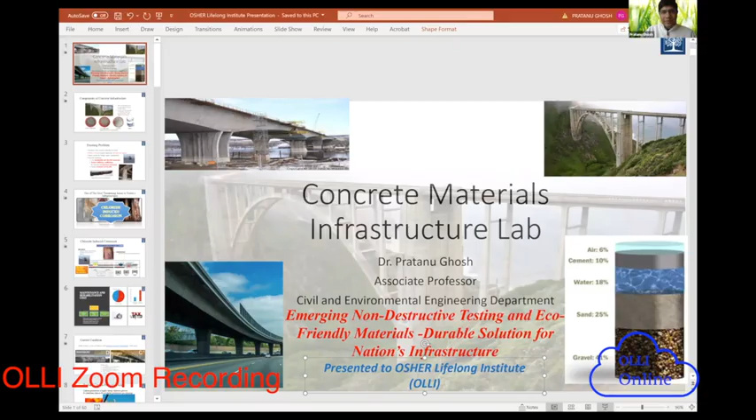So I'm going to talk about basically today two parts. One is what kind of high performance concrete material should we choose for enhancing the service life of bridges and pavements throughout the US, and what kind of emerging new non-destructive testing should we follow for better evaluation of our nation's infrastructure, especially concrete and concrete pavements.

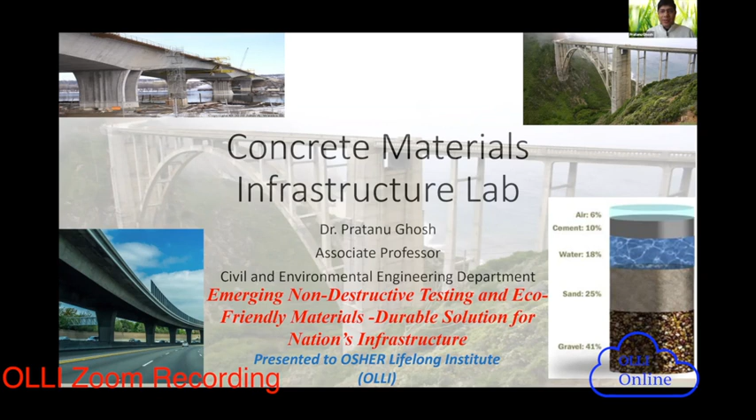So being said that, we need to think about what we are talking about with concrete infrastructure. As we know, 70% of all bridges in the US are made of concrete. That's the federal highway data from 2016. And in 2015, 80.4 million tons of Portland cement was produced in the United States for construction of concrete bridges, pavements, or other infrastructure like tunnels and dams.

So we can imagine concrete is one of the most versatile and most widely used construction materials, not only in the US but all throughout the world. Most everyone is probably aware that concrete is made of aggregate rocks, fine aggregate sand, cement, obviously, and water. And sometimes we need some chemical admixture to enhance the process of the concrete.

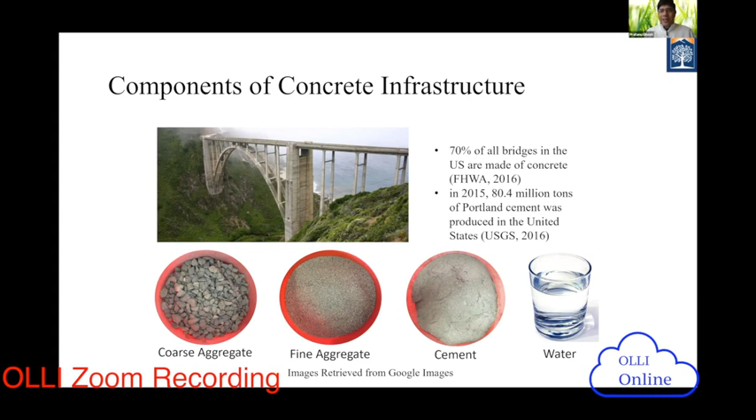So I'm going to talk a little bit more in layman's language. I know some parts of the presentation are highly technical, but I will touch down and try to make sure that it is more general.

So being said that, what is the biggest problem right now in US concrete infrastructure, especially in concrete bridges and pavements? We know, other than Southern California, most parts of the US go through in winter a heavy amount of snowstorm or snowfall.

So these roadway salts we put basically in the bridges and pavements to melt the snow in the winter. But there is a challenge - even though the snow is melting, sometimes we forget that this salt starts to ingress from the top of the concrete slab and going through the concrete over time, and then it starts to attack the reinforcement, the rebars within concrete, which is susceptible to corrosion. So this rebar corrosion is one of the major challenges which is happening by chloride ion ingress.

The chloride salts - generally you put sodium chloride or potassium chloride on top of the bridge deck slab or pavement slab to melt the ice. But that salt has a detrimental effect, as we can imagine.

So every year we spend at least $90 million for bridge repair and replacement, just for bridge repair and some periodic rehabilitation. So we have to think about it - it's becoming a burden on U.S. Federal Highway Administration and federal government.

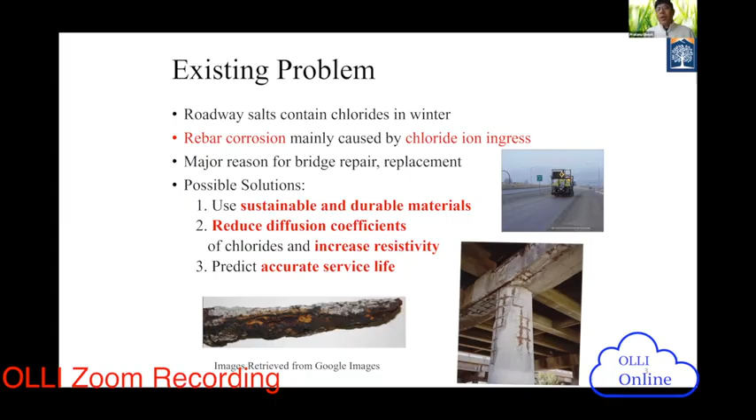If you can reduce or delay the diffusion process of chlorides and increase the resistivity - resistivity being an indirect way of measuring chloride penetration in concrete - then with higher resistivity and lower diffusion, the concrete will be really good, and it can delay the diffusion of chloride. So it will take a long time to initiate corrosion.

It's a natural process, so there's no way we can remove corrosion entirely. All we can do is use really good sustainable, durable materials, use better reinforcement, and predict the service life better, so the rehabilitation process is smoother. The Federal Highway Administration coordinates with different Departments of Transportation on when rehabilitation should happen, instead of doing maintenance every year. So, how bad can the corrosion process get? We can see some pictures.

You see how the rebar looks when it's really badly affected by corrosion. In some columns, all the reinforcement is exposed. After a certain amount of time, it basically becomes functionally obsolete. That doesn't mean the whole structure will right away fall or collapse, but it becomes functionally problematic.

And it continues with the heavy amount of traffic load. Sometimes it's the combined effect of corrosion and traffic load, which happened in Minnesota 10 years ago - on I-35, one of the bridges collapsed basically due to corrosion. Initially the problem was there, cracking developed, rebar was exposed, and on top of that heavy traffic load was going on over the bridge.

As you see in the pictures, this is one of the biggest threats to our nation's infrastructure. What happens when corrosion occurs? One thing to imagine: concrete is very weak in tension. Tension means pulling away - if you try to pull the concrete apart from the side, it starts to crack heavily.

Whereas if you try to push the concrete, it's okay - concrete is very strong in compression. Pushing means compression, pulling away is tension. So concrete is very weak in tension. Due to corrosion, concrete's tensile capacity starts to weaken. That is one of the major challenges.

We always see that concrete covers are there - cover means some amount of cushioning before the reinforcement is placed. If you have very little cover, that's also a challenge, because if corrosion happens easily, the rebar gets exposed, corrosion starts to propagate heavily, and the functional part will be gone. So this is the chloride induced corrosion mechanism.

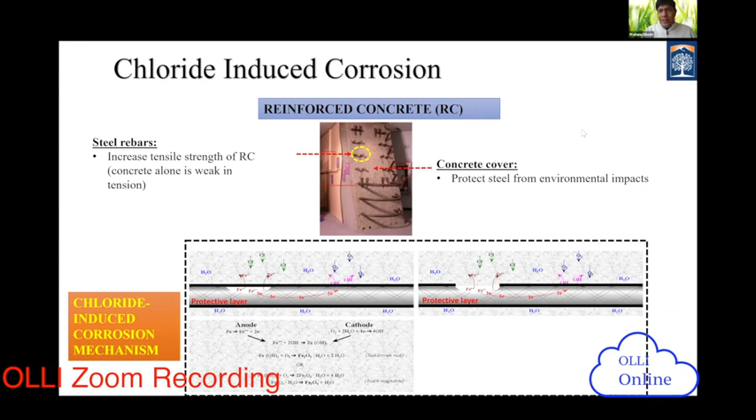Again, I'll start to explain how corrosion happens in concrete. In general, the first thing that comes to mind is that corrosion means the rust product.

So what happens first, at the rebar level, the rust products are formed around the reinforcement. Those rust products aren't right away bad. They're forming a protective layer around the reinforcement. So generally people think rust means really bad, but no, rust is initially okay since it forms a protective layer. As you see in the picture, the black protective layers are formed around the reinforcement.

But then, in the presence of moisture and oxygen, the chloride salt, as you see from the top, starts to ingress into the concrete. We're putting the salts on the pavement, and that salt starts to ingress in the concrete. After a certain amount of time, they start to attack the rebar. The chloride salts come from the top, and then they start to attack the rebar, so the rebar's corrosion product starts to enhance. Then the problem starts, you can imagine.

Initially, the corrosion products, which is basically rust, were okay - we see anodic and cathodic products forming compounds, basically red-brown rust and black magnetite. But after a certain amount of time, they get attacked by this chloride salt. Once the chloride salt attacks, the corrosion process starts to enhance, as you see the buildup of corrosion products. Further corrosion happens, more and more surface cracks develop, and then eventually spalling happens.

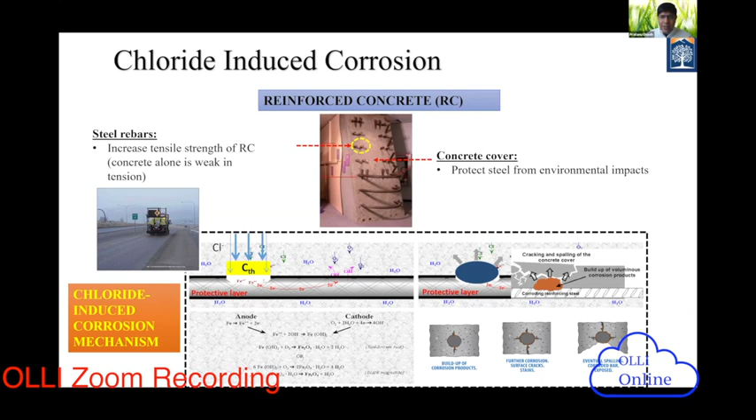So this is the major process. Just to give you an idea how much maintenance and rehabilitation costs are done in the US: the total number of bridges in the US, approximately at the 2014 level, was 607,380, out of which some 200,000 are steel bridges, reinforced concrete bridges are 235,000, and precast concrete, which is also a little bit newer bridges.

Most of the bridges in California, you see precast concrete - they're built in a workshop panel, then right away you can build it on site. It's easier and less prone to corrosion - 108,000 of them. So you can imagine that heavy amount of bridges, all newer bridges are built mostly with concrete because steel bridges are so costly and the corrosion effect is huge. Even though we say corrosion in concrete, it's kind of a misnomer - concrete itself doesn't corrode. It's the reinforcement, the steel within the concrete, that corrodes.

So, being said that, we can imagine who is the most challenging part, which is the rebar, basically.

Current spending on repair and preservation, as you can imagine, is 16.5 billion, and we need around 45.2 billion. So a huge amount of our taxpayer money is going to maintenance and rehabilitation. That's a huge challenge for our concrete infrastructure, and that's why we keep hearing about the infrastructure deal.

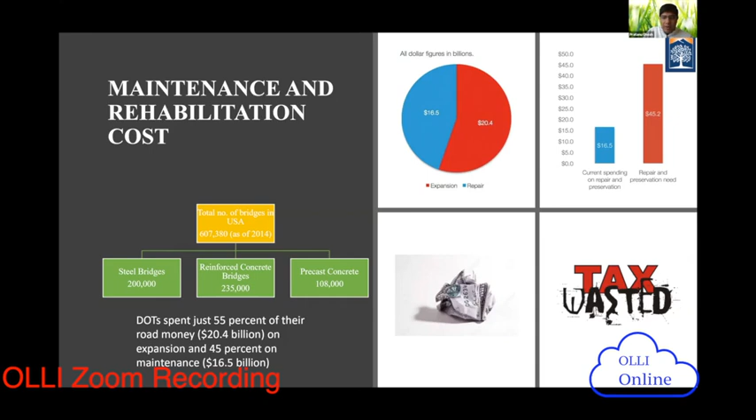So current condition - this is the current condition, though not very current. Just a few days ago the newer rating came out. ASCE, American Society of Civil Engineers, gives a report card, basically a diagnostic report card, a doctor's report kind of thing, evaluating America's infrastructure.

They gave a grade of D to pavement in 2013, and the highest grade was basically a C plus. In 2020, sorry, 2021, just a few days ago, the new report came out, which is basically the same. Nothing has been improved much - pavement becomes probably C minus, and bridges become C. A little bit of improvement, not so much, because the infrastructure deal still didn't happen.

So we can imagine where we are standing right now with our infrastructure. It's a huge challenge - we have to improve our bridges and pavements. Otherwise, just to give an idea, one in four bridges in the US are functionally obsolete. Again, that doesn't mean they'll fall away right away, but they're functionally obsolete due to various problems, and corrosion is one of the major challenges, as we can imagine.

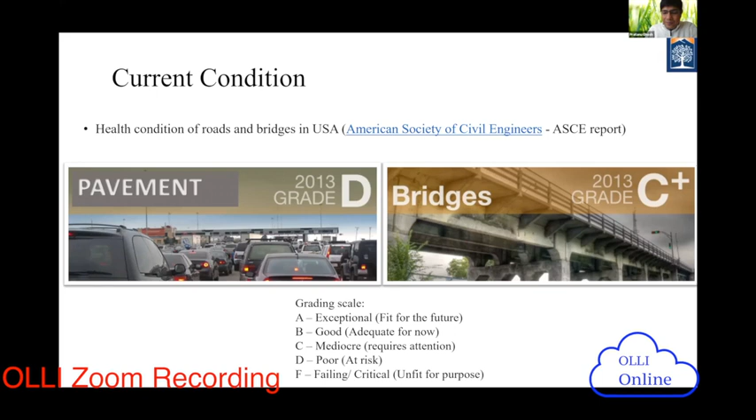So now the time comes, we need to think about what kind of materials we should use, basically cementitious material. We talked about rebar, how we improve its quality, but we need to think about how we can improve the quality of concrete, and the different types of emerging testing.

We know that cement production is a very highly energy intensive process. In the big kiln, as you see, it's a 60-meter long kiln. Basically the cement clinkers are produced at different temperature zones. How high? It can go up to 1450 Celsius.

Cement production itself contributes 6% of global greenhouse gas emissions. We can imagine - out of all construction, just cement production is 6% of global greenhouse gas emission. It's huge.

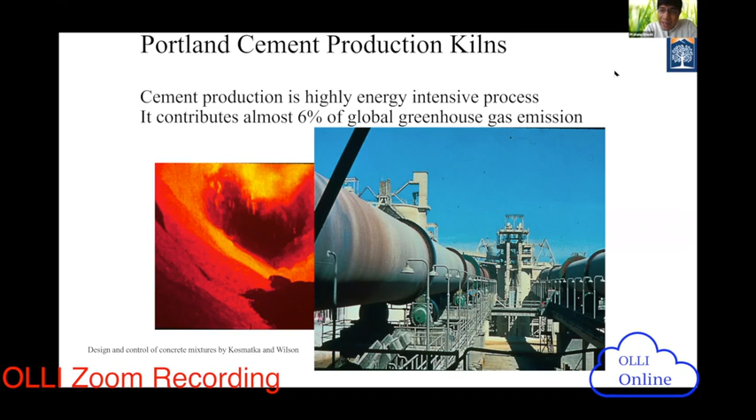On the sustainability side, as we become more conscious about the environmental part, we need to think about whether to continue with original cement, or use some alternative cementitious material similar to cement, combining with it to make it more sustainable and durable. We cannot compromise the quality or durability of concrete just for sustainability - we need to improve both durability and sustainability. That is our main agenda.

So, big picture - so far we talked about how chloride induced corrosion is a huge challenge in concrete. Every year we spend so much money on corrosion maintenance and remediation. Then there's CO2 emission also, because cement production is needed heavily for concrete infrastructure construction, but that accounts for 6% of greenhouse gas emissions.

So when you have heavy CO2 emission, increase in sea level happens. And when you have a heavy amount of corrosion, we are verging on the collapse of some bridges. If we combine these together, we can see the big picture - what will be the solution? How to reduce CO2 emission is one challenge. How to save money - we need economical materials, because you cannot use costly materials when the cost is already going high. And third, how to stop these disasters like bridge collapse or pavement collapse. So this is the big picture.

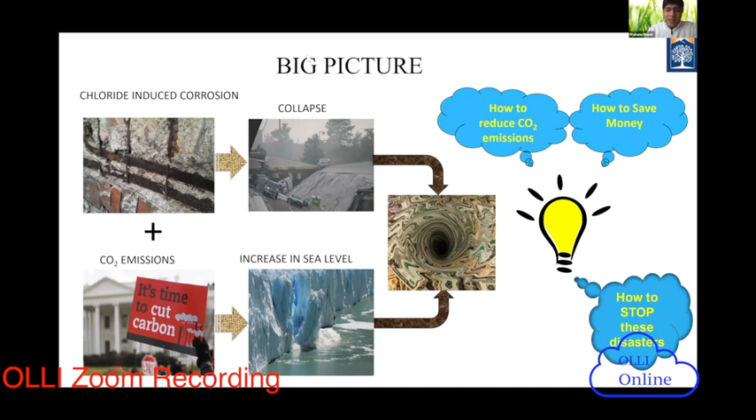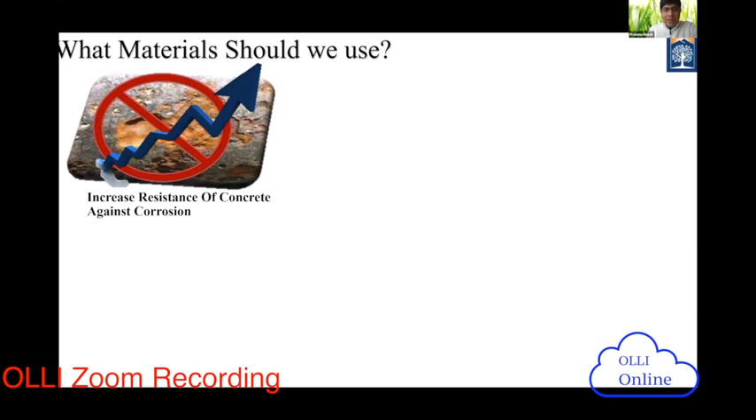So we need to think about alternative, better materials and emerging technology testing so that faster we can evaluate our nation's infrastructure. So let's think about what material should we use. We have to think about using some material which could provide increased resistance to concrete against corrosion, and it should be available throughout the US.

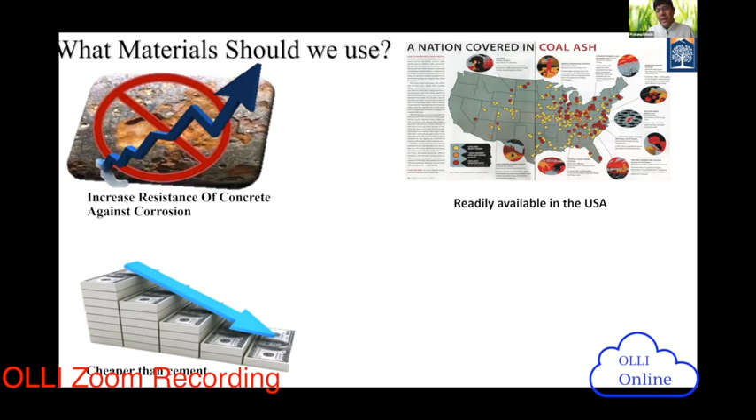Not only can we use different materials from different regions, but some locally available resources should be used. We'll talk about how locally available resources are being used throughout different parts of the US. Then it should be cheaper than cement or comparable, so that even though some materials are a little costlier than cement, the overall life cycle cost will be reduced. Why? Because the corrosion initiation time will increase, it gets delayed, so the overall life cycle cost will be heavily reduced. And obviously we are thinking about green products, basically reducing CO2 emissions.

So sustainable, durable, cheaper - those are all challenging parts if you think about them together under one umbrella.

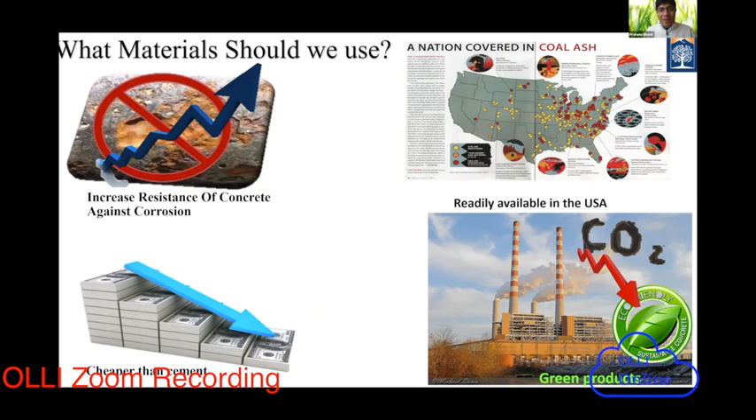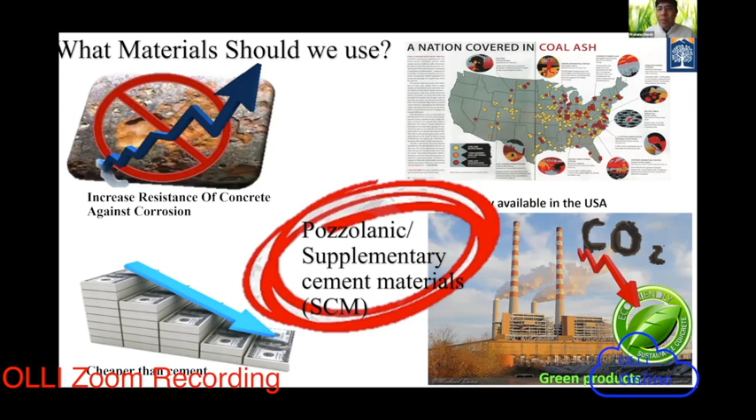So being said that, we are going to use different pozzolanic supplementary cementitious materials. In abbreviation, we call it SCM. It is not a direct cement, but it's a supplementary cementitious material which has the properties of what cement has, and it is called pozzolans. So let's discuss these materials.

So what kind of pozzolanic material are we using? Obviously we cannot directly use 100% pozzolans for making concrete. You have to have your original cement, at least 50%, because cement goes through hydration, which is very much necessary. Pozzolans also go through hydration, but it is a little bit slower because of the different chemical composition.

So being said, we are going to use some fly ash, which is available throughout the eastern part and the Midwest. Silica fume, a very, very fine material - we are going to talk about each material. Then used metakaolin, some natural pozzolan, and slag, which is coming from the iron industry, in different replacement levels.

How have these replacement levels been used? This has been tested for the last 30-40 years in the lab, and DOTs have recommended this amount of replacement level to better combine with cement and make binary and ternary mixtures.

What is meant by binary? Cement and one component, basically one pozzolan, we call binary. And when we have cement plus two pozzolans, we call that ternary.

So some questions came out: what is Portland cement made of? Portland cement is made of some raw materials we talked about, like rocks and limes and these things. The raw materials feed into the kiln, and it comes out like a marble-shaped clinker. On the other side, the clinker is ground to fine material and put in the bag, as you see the cement bag.

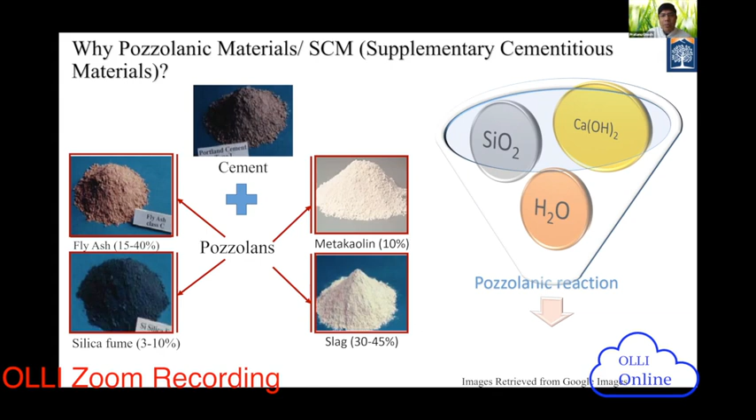So being said, now let's move to the next one. We see that these pozzolans have a heavy silica component. When they combine with calcium hydroxide and water, they produce a pozzolanic reaction, and that pozzolanic reaction makes a compound we call calcium silicate hydrate. I'm not going into details, but we call that CSH gel.

This special CSH gel provides the hydraulic binding capacity of the concrete. So what is the outcome? It gives very high strength and resistivity. That's what we are aiming for - higher strength and resistivity.

Not only is the strength going to improve, but more resistive concrete means less diffusion. Less diffusion means we are delaying the corrosion. Delaying the corrosion means we are getting a higher initiation time. That means the service life of bridges is going to be increased. That's what we want - a heavy amount of calcium silicate hydrates.

It's a gel-type compound. You cannot see it with the naked eye, but you have to go through scanning electron microscopy to see the interior of the cement matrix, to see how the CSH gel has been formed within the cement matrix.

Now we are going to talk about pozzolan. So what is meant by pozzolan? Pozzolan is used in conjunction with Portland cement. It is not directly used as 100% Portland cement. It contributes to the properties of the hardened concrete through hydraulic or pozzolanic activity, as we talked about.

You can have different types of pozzolan. There is natural pozzolan, basically coming from volcanic ash. In the west parts of the United States, especially California, Idaho, Wyoming, Arizona, Nevada, we are heavily dependent on natural pozzolan because we have so many active volcanoes, so we already get a heavy amount of volcanic ash.

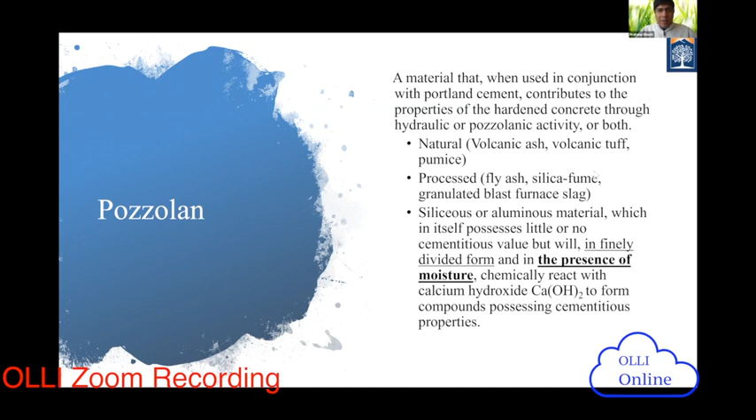So let's talk about different pozzolans. First, we are going to talk about fly ash. Probably you have heard about it - it is used in concrete as a supplementary cementitious material, and it's not something new. This is a mineral admixture, used by ancient peoples like volcanic ash, similar to how fly ash is used in construction today.

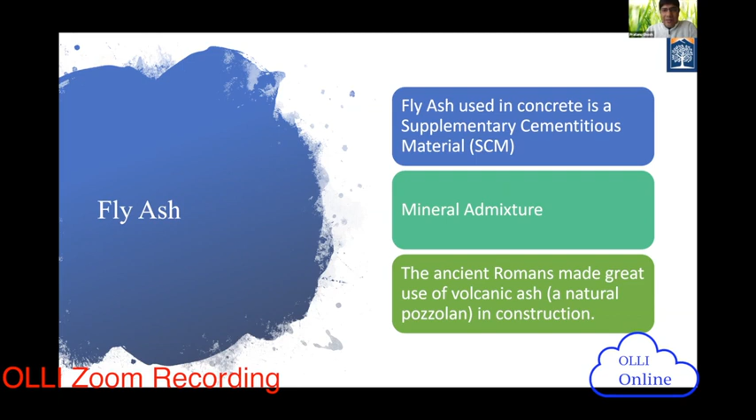So we'll see how this fly ash comes about. Fly ash is mostly coming from the residue of the combustion of powdered coal, from the coal power plant, and it's transported by the flue gases. When the residue comes, some of the worse materials are fused off - basically carbon dioxide and other materials - and whatever remains is transported by the flue gases.

Fly ash is not new to the concrete industry. We have a huge amount of coal power plants in the Midwest and some of the eastern part, so fly ash has been heavily used for the last 25 to 30 years. But there are some challenges with fly ash - the EPA has put some restrictions, and coal power plants are mostly closing down all throughout the US. So being said that, we have to find more and more alternative new pozzolans.

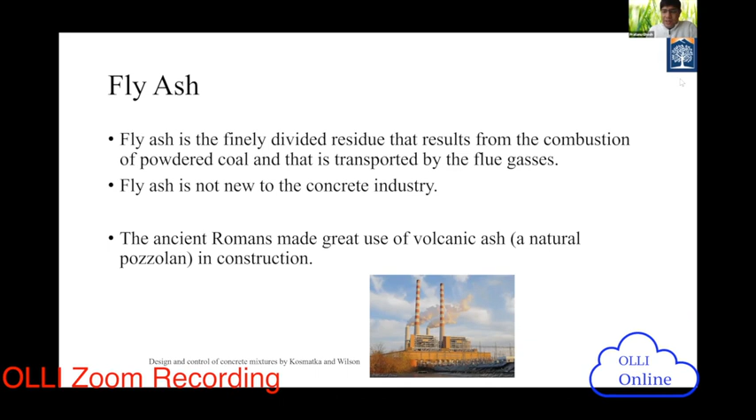Now, ancient Romans used volcanic ash a long, long time ago as a natural pozzolan in construction. Here are some pictures - one really great picture, this is Appian Way, the gateway to Greece from Rome. It was built 312 to 244 BC, 410 miles long, a pavement built with just volcanic ash. At that time the technology was not there for quality control of the concrete, but it's just volcanic ash, and these roads are still standing with some minimal problems, but still standing.

So these are the great parts of concrete innovation that we can talk about.

Will the use of these additives increase the compressive strength of the mix? Yes, definitely. When you add fly ash, slag, silica fume, and other materials with cement to make concrete, the compressive strength will increase heavily in the long term, not in the short term. We are already talking about that long term strength and durability. That's the thing we need to think about. So this is one of the wonders we can think about.

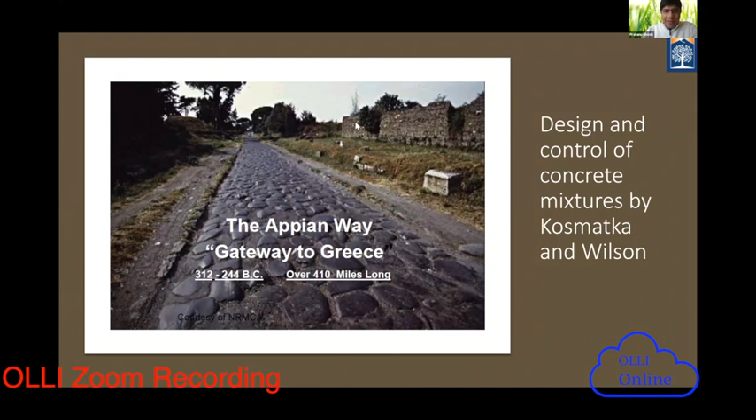Let's think about fly ash. We have two types of fly ash. One is class F, which has low calcium and comes from bituminous coal, and it is more pozzolanic. The other is class C fly ash, which comes from burning subbituminous or lignite coal. Different types of coal are there, and it is more cementatious and pozzolanic.

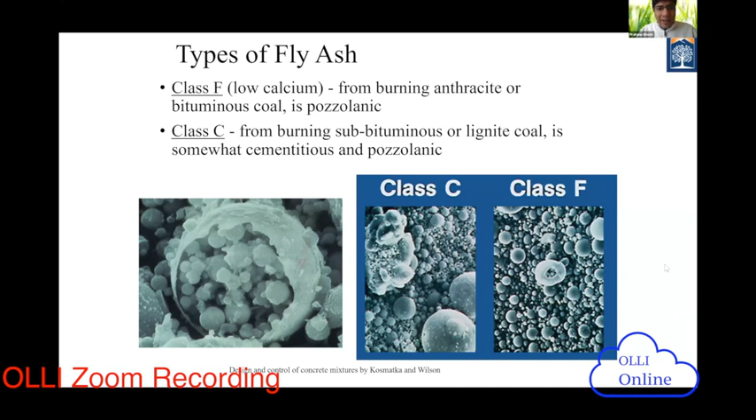Becoming more impermeable means less diffusion, and less diffusion means we get higher initiation times. Let's see the next one - the left side picture is the cement particle, and you can see cement particle has a bigger particle size compared to the fly ash picture. When fly ash is used in combination with cement, cement replacement is done by mass - for example, using 80% cement and 20% fly ash.

It could be class C or class F. It is used as a supplementary cementing material, as we talked about, SCM, and also it is used as an admixture. So the name, sometimes it is called as pozzolan, sometimes supplementary cementitious material, and sometimes mineral admixture. We have two types of admixture: chemical admixture and mineral admixture. So this one is called mineral admixture. It is an integral material in concrete, and cost is also related to the transportation part.

On the West Coast, we are relying on fly ash, but at the same time we rely more on volcanic ash because we have so much of that resource. All the volcanic ash mines are throughout Idaho, and we have used them in our lab. I got donations from some companies, those natural pozzolans. But if we need to use fly ash, we need to get it from Wyoming, the Midwest, or the East Coast. So even though it is a sustainable material, if you start to heavily bring it from the East Coast or Midwest, the transportation cost will increase.

At the same time, that will contribute to CO2 emissions. So we do not want to go back to the original condition. Yes, we can rely on it, but we need to use locally available resources. Every region uses their more advantageous material. That's why it is heavily used in the Midwest, the eastern part, and even the southern region. But in the West Coast, it is used in a moderate way. So heavy benefits are there, as you can imagine.

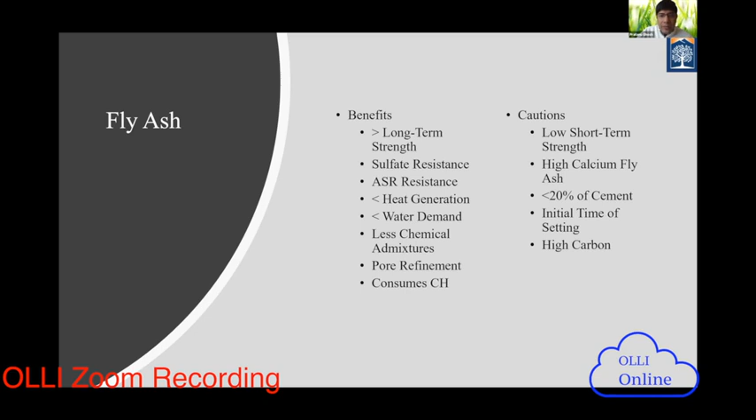Now we are going to talk about slag, another sustainable material, which comes from the steel industry. Slag is in a granular form, and rapid cooling happens for the slag. How is it formed? When the molten iron in the blast furnace, the slag is rapidly chilled by immersing it in water. Then we get the blast furnace slag.

It has three different categories - three grades we are talking about: grade 80, 100, and 120. Different grades have different activity levels. Obviously, 120 is more active slag, 100 is moderate, and 80 is the minimally active slag. Its cost is related again to transportation and grinding, how much finer material we are getting. So slag is also moving more toward being cementitious.

Its particle size is smaller than cement, but not too much, so it is also used as a cement replacement. It is heavily available in the Midwest and in the South and East Coast. Slag is very rare in Southern and Northern California because we do not have any slag silos around here, so mostly ready mix concrete companies avoid slag in California. It is popular in some regions, but not on the West Coast, because of the lack of locally available materials.

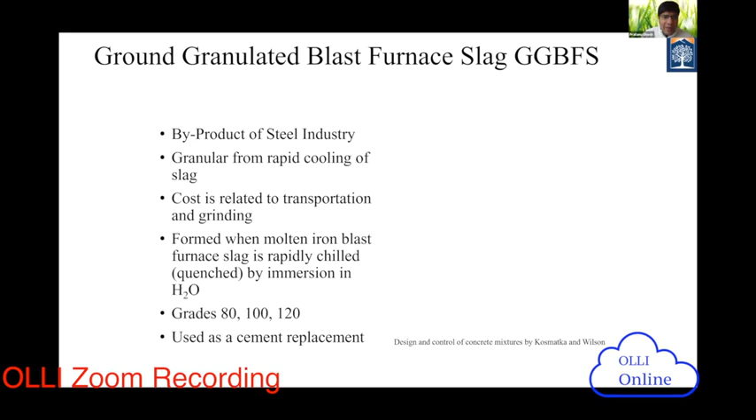But it has heavy advantages. Let's see what they are. Slag looks more whitish gray. Different pozzolans have different colors - fly ash is more whitish, and this one is gray and white, a combination of colors.

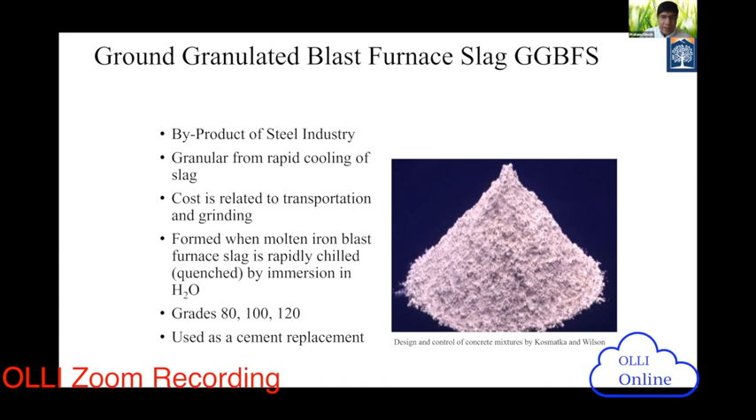So now let's see the benefits, similar to what we talked about. Major benefits: it provides corrosion resistance, sulfate resistance, ASR resistance, pore refinement, filling up the voids, less water demand, easy to deal with, providing long term strength, and less heat generation. Because it provides less heat generation, it is sometimes heavily used in mass concrete structures.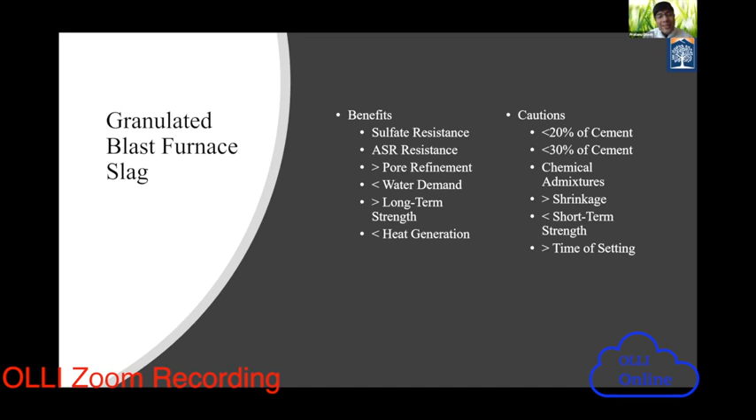Mass concrete means dams. Dams go through thermal cracking, because the interior portion of the dam walls are so thick that interior portions stay cold, whereas outside could be very hot because of the sun and environmental conditions. This difference of temperature can create thermal cracking. So if you make the dam with a material that generates heavy heat, the thermal cracking would be imminent right away after a few years of construction.

That's why in dams, in mass concreting on heavy or large foundations, we are these days heavily using slag combined with cement. The reason is it provides less heat generation. When it generates less heat, the chance of thermal cracking will be much less. Again, we cannot remove the whole problem, but we are just trying to make a better concrete.

So what are the cautions? As slag is more cementatious, you need a heavy amount of replacement. Less than 20% or less than 30% of cement replacement will not provide any benefit - rather it could create more disadvantage. And we have to think about using chemical admixtures to control the strength.

Short-term strength is low, as we talked about - some materials provide low short-term strength, but long-term strength is better. Time of setting is also challenging; sometimes it takes a long time for setting, which is challenging in winter regions unless you use a good amount of chemical admixture to accelerate the process. In hot regions it is easier, but in winter regions it is a problematic sign for ready mix concrete trucks.

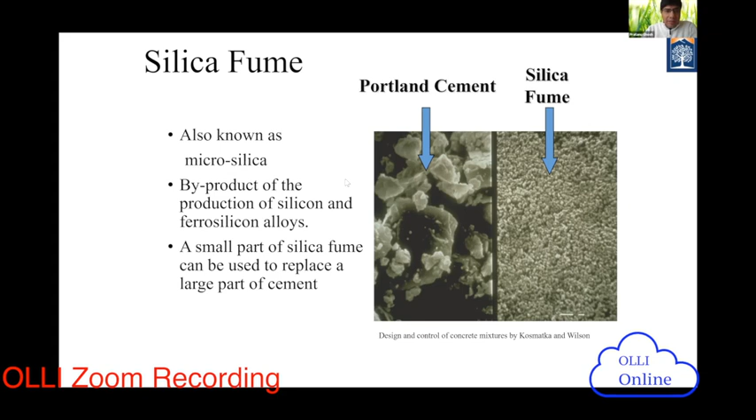Now let's move to the other part. When you talk about silica fume, it is a residue from ferrosilicon products, and an extremely fine amorphous material, usually used in granular form, but sometimes also in liquid form. It is very costly compared to cement particles. As a ballpark, cement price is $100 per ton, whereas fly ash is $60 to $70 per ton. Similarly, steel slag is $70 to $80 per ton, whereas silica fume is way higher, $300 to $400 per ton.

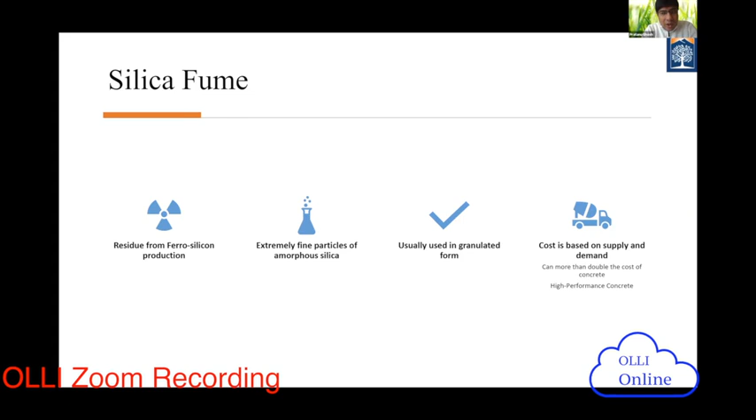Even though it is very costly, that's why we need very little of the replacement. The reason is you do not need much. It is already such fine material that it provides the benefit without much replacement level. So even though initial construction cost could be a little bit higher, the long-term life cycle cost will be way lower. And cost is obviously based on supply and demand. When you use silica fume in concrete, we can easily call the concrete high performance concrete. These are the things we need to keep in mind.

So what are the benefits? Heavy amount of pore refinement. This time you generate strength heavily from the very beginning. So when you replace cement with silica fume, you start to get very high strength from the beginning, and not only that, you also get long-term strength. That is the biggest advantage of silica fume compared to fly ash and slag. Fly ash and slag provide a little bit lower strength initially, then they catch up and exceed the original cement strength, but silica fume provides very high strength from the very beginning.

In some situations, like fast track paving, the contractor mentions that we need to pave it out in the next 7 days, and we need very good strength. So what we do is we need concrete that can generate the strength that would generally take 28 days to develop. We definitely provide silica fume so that we can generate very high strength within 7 days, comparable to 28-day strength, and the fast tracking can be easily done.

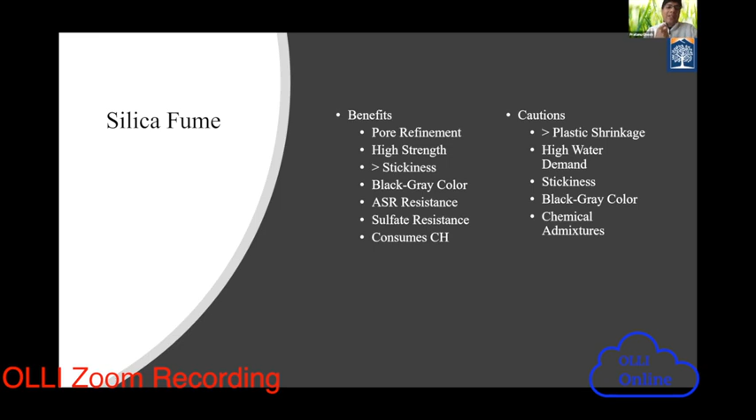So we're getting another question: how does air entraining affect the strength of the concrete, and does it react with various additives? Very good question. An air entraining agent is basically a chemical admixture that is added to concrete to manipulate minuscule air voids within the concrete.

Why do we need that? Because of the freeze-thaw problem in concrete, which is not a problem in Southern California, but you can imagine many parts of the US, specifically the Midwest. Let's pick a place, say Chicago. There, in winter we get 10 degrees Fahrenheit, and in summer we get 110 degrees Fahrenheit. So the temperature difference is very high, causing this freezing and thawing effect. The aggregate starts to break down within the concrete because when water turns into ice, its volume increases and expands, creating cracking within the concrete because it exceeds the tensile strength of the concrete due to the freeze-thaw problem.

So when you create these minuscule air bubbles within the concrete using an air entraining agent, we are creating pressure release chambers for that expansion so they can release the pressure, which reduces cracking due to freeze-thaw. That's why the beneficial effect occurs. There are two types of voids in concrete: one we call entrapped air, the other we call entrained air.

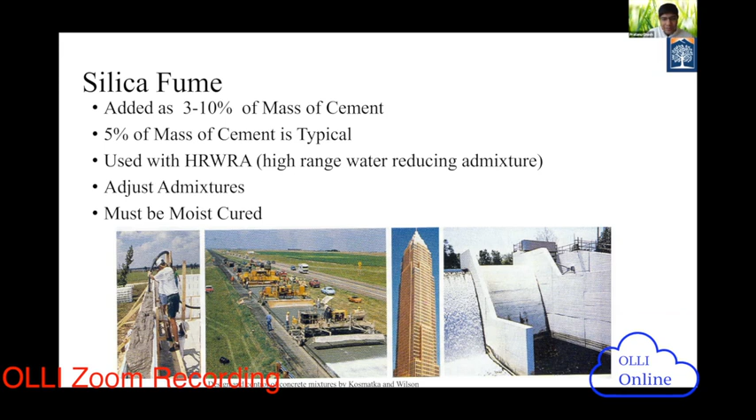So you see all the construction with the different materials we talked about so far. Fly ash we talked about in buildings, silica fume is very common. In dams, as you see, we are heavily using slag, and some fast paving construction also uses silica fume.

There are some natural pozzolans out there, mostly relied on in California. They are heat treated and cleaned, then ground to a fine powder. They include materials like clay, shale, and metakaolin, and sometimes volcanic ash. These are all whitish, mostly cementitious powders, heavily used as natural pozzolans.

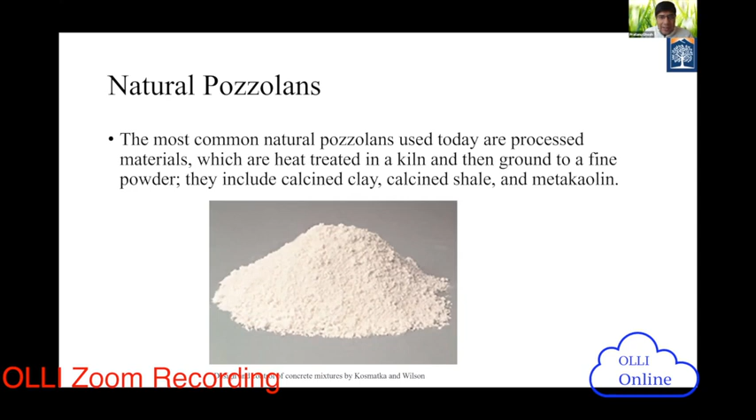One of the materials we have used in our lab is called metakaolin. It's a special calcined clay, produced by low temperature calcination of high purity kaolin clay. That product is ground to an average particle size of 1 to 2 micrometers. You can imagine how fine that material is - similar to silica fume, about 50 times finer than ordinary Portland cement.

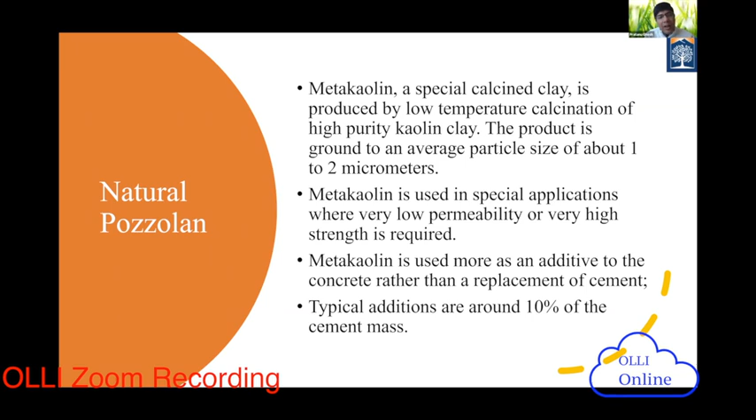So same effect: binding better, voids are reduced, impermeable concrete. It's used for special applications - we cannot use metakaolin everywhere. Wherever you need very low permeability and very high strength, metakaolin is the ultimate choice. It's used more as an additive material rather than a replacement for cement. Typical addition is again 10%, you don't need a heavy amount. It's a little costlier than cement, but overall life cycle cost will be reduced.

Another recent material my students have tested in the last 2 years is called pumice. It's a volcanic ash - we got a donation from the southeast corner of Idaho, about 23 miles northwest of Malad City. We have a huge reserve, millions of tons, of white pure pumice that is in high demand all over the world. You can see the pictures.

These are naturally calcined materials, highly sustainable, with zero CO2 emission. When you replace cement with pumice or other natural pozzolans, you are heavily reducing CO2 emission in the concrete. It's an environmentally low impact process, which is why it's called ultra pozzolan - hence the company name of those producing the pumice. It's a lightly colored ultrafine pozzolan, average particle size between 2 to 4 micrometers, and typically we replace cement with 15 to 25% pumice.

So that's the new material we are testing, and we're getting really remarkable results with strength and durability. These are the things we rely on in the West Coast because they are so easily available - pumice, metakaolin, calcined clay, calcined shale, fly ash, and silica fume. But not too much on slag, since slag is rare in Southern California.

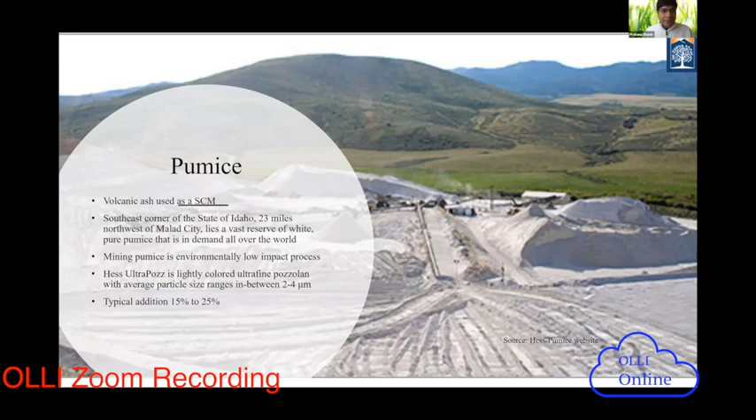So, overall, just finishing up the material part, then we'll talk a little about the testing part. What is the advantage of SCMs? If we summarize, most SCMs are cheaper than ordinary Portland cement, they are sustainable with no CO2 emissions, and they are way stronger than ordinary concrete when mixed with OPC.

They are durable against corrosion and other potential problems in concrete. They are also easy to use if you know the properties - silica fume has some challenges, but once you know the properties, you can use better chemical admixtures to deal with those materials. This is the overall benefit of sustainable and durable materials, which are now heavily used in concrete bridge decks and pavements throughout the US. Nowadays, no new bridge decks are built with just ordinary Portland cement concrete - you have to have some binary and ternary mixture.

Binary means cement with one pozzolana, ternary means cement with two other pozzolans, basically. And the replacement level we talked about.

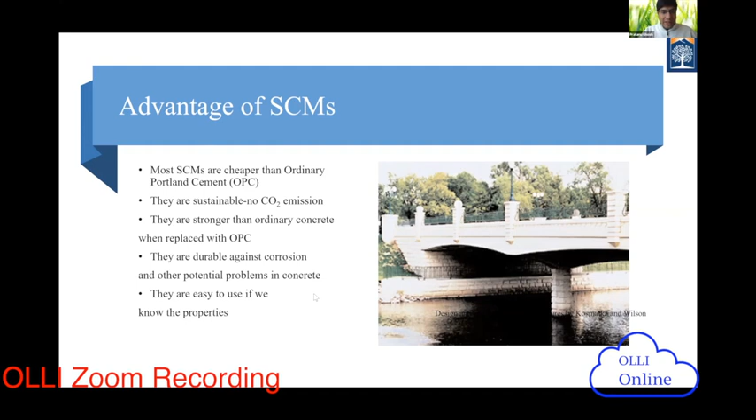Now I'm going to talk a little bit about the testing part. As I mentioned, one part of my presentation is the materials. The second part is basically what kind of testing we should do, new testing technology, so that we can better predict our concrete infrastructure evaluation.

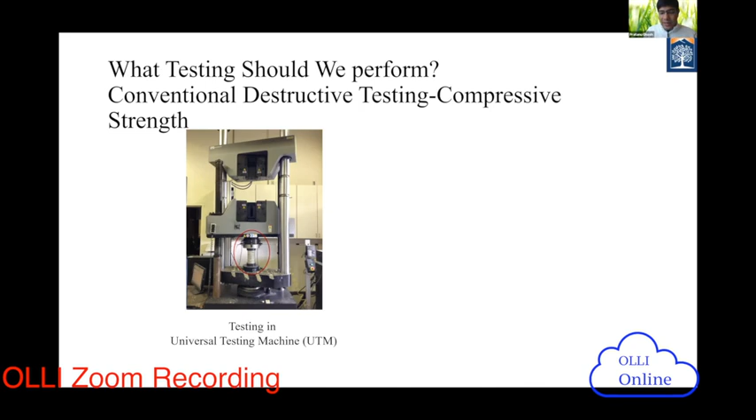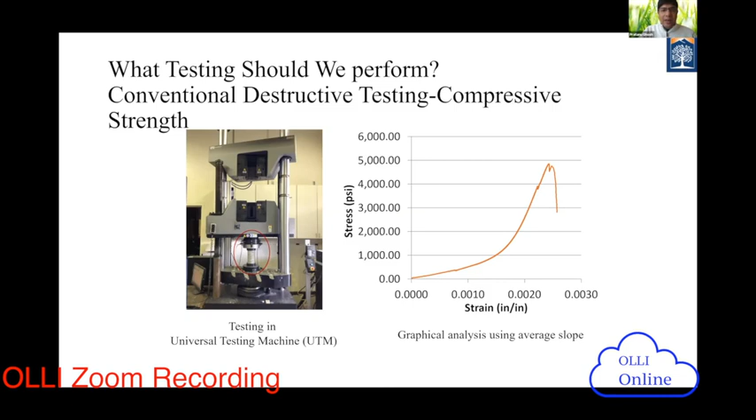One thing you can imagine, originally they were tested by strength testing, which we have in our civil engineering lab, checking compressive strength with a universal testing machine. These are destructive testing. We can plot the graphs, get stress versus strain, and get the strength at 7 day, 14 day, 28 days.

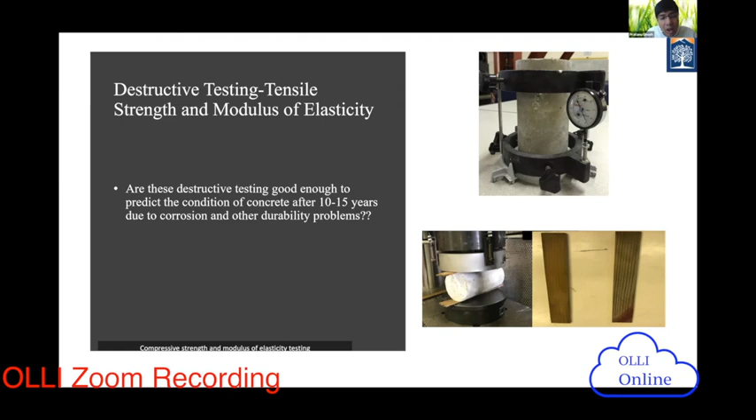But the question is, this destructive testing needs a heavy amount of manpower and materials, because we are crushing samples. We need at least 3 to 4 representative samples to crush and get the strength and modulus of elasticity. But are these destructive testings good enough to predict the condition of concrete after 10 to 15 years due to corrosion and durability problems? Or should we come up with some new emerging technique to predict corrosion and strength?

So one thing we can think about: we just checked how strength has been measured in a destructive way by crushing concrete. There is another way to check strength indirectly by measuring temperature and time with a maturity meter. These are all non-destructive testing.

This maturity equipment you can just put and log at the actual bridge deck site. Automatically it records right after the concrete pouring, you install it with sensors, and it measures time and temperature. That indirect way provides you the strength of the concrete.

So in that way you do not need to destroy the sample, and you don't need to test that many samples. You just place maturity meters at different locations of the concrete bridge right after pouring, and that way you can find the maturity, which is basically maturity of strength. We are getting an indirect measure of maturity for each high performance concrete mixture. So that is very advantageous.

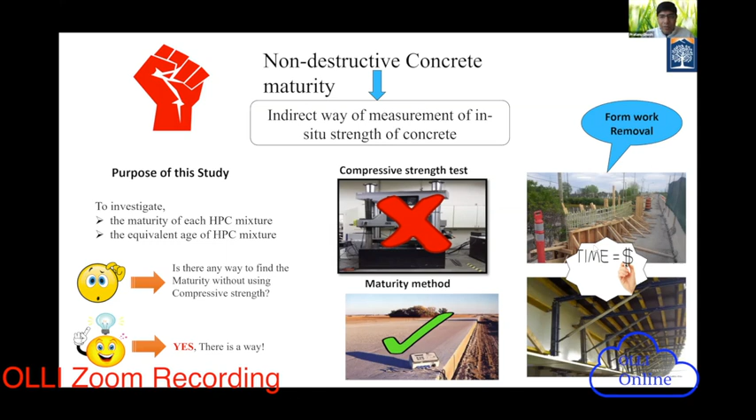Why? First of all, less manpower. This automatically records the data within the machine and then you can download it to your computer. It saves money, as you can imagine, and it's reliable equipment providing very precise data over a long period of time. So this is one of the major things we check for strength.

Then for durability, we have several non-destructive testing methods, as you can see in these pictures. This is the technology right now — the US is gaining heavy momentum using different types of non-destructive testing to evaluate concrete infrastructure. One of these is based on artificial intelligence and sensor-based technology.

One of them measures resistivity. You see different resistivity techniques, surface resistivity meters, Wenner probe, 4-point Wenner probe. You just touch the meter on the concrete sample — you're not destroying it, just touching it with wet sponges — and it gives the resistivity value right away. So if you have high resistivity value, we have less diffusion right away.

Similarly, we have some conductivity measures in concrete. You plug the sample in within the ends of the Merlin meter or RCON, and then you record the conductivity of the concrete. So conductivity of concrete is another indirect measurement for evaluation of infrastructure.

Why? Because we're comparing it like charge, from the physics we know. If more charge passes through the concrete, this is an indirect indication that more chloride can diffuse through the concrete. We're comparing and trying to simulate the real-life corrosion condition within the lab by the charge pass mechanism. So more charge pass enables more corrosion.

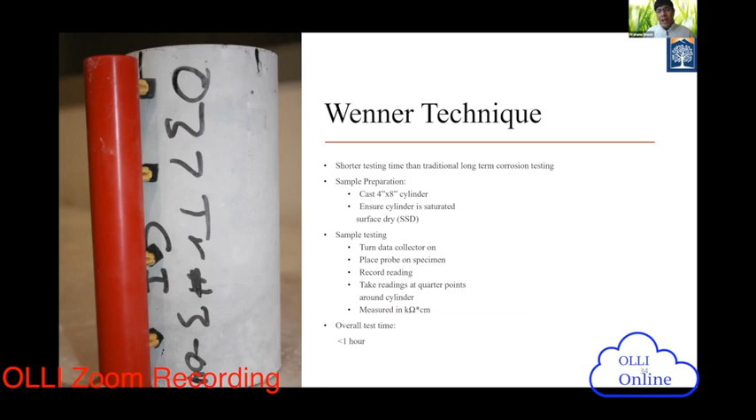Overall testing time is less than 1 hour, thinking about preparation time and everything together. If you do big corrosion testing, that can take hours and hours and days, which is very disadvantageous. Compared to that, how much more beneficial this is, you can imagine.

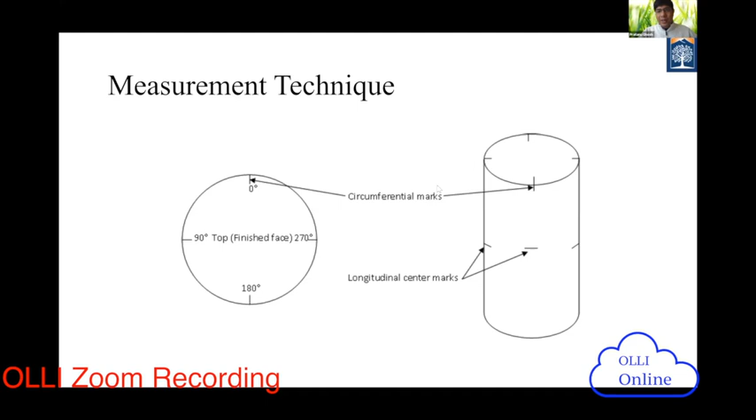So this is the measurement technique. Again, I'm not going into details of the 4 corners you are measuring, 1, 2, 3, 4 basically, so you get data points. This is then basically the equipment.

This equipment is heavily Resipod Proceq. It was originally developed in Germany, but now the US has their franchise, so we get the equipment from one of the US branches, and it's so small, just very small equipment, nothing basically. It's 1 foot long, and 4 probes are there.

So it's so easy to use, even high school students can use it basically, but it can provide data that is so much reliable, as you can imagine.

Do SCMs provide an advantage? I'm just seeing the question, it's still not fully there.

When you are using this equipment with different high performance concrete, when you are using SCMs as we talked about, they provide very high resistivity. So we are using better material, we are evaluating the concrete with better equipment basically. So that gives one of the better advantages, as we talked about.

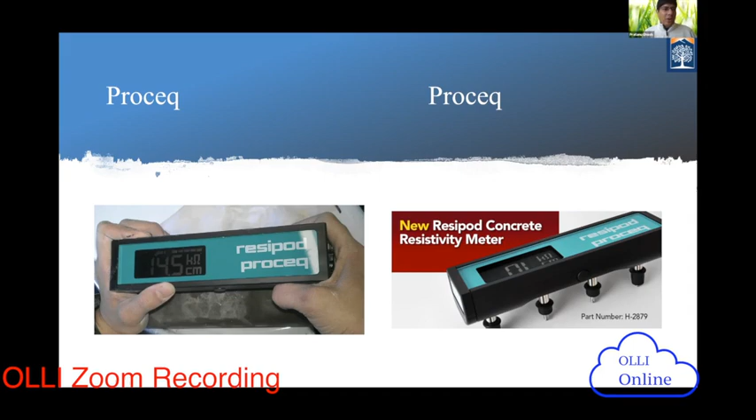So SCMs provide better advantage when the earthquake occurs. Yes, some of the materials, SCMs provide better strength. As we talked about, in a building the strength makes a big difference during an earthquake. Specifically silica fume concrete can provide really high strength, up to 10,000 psi concrete at 28 days, which is the strength we use in the design of buildings. So definitely it provides high strength and durability both ways basically.

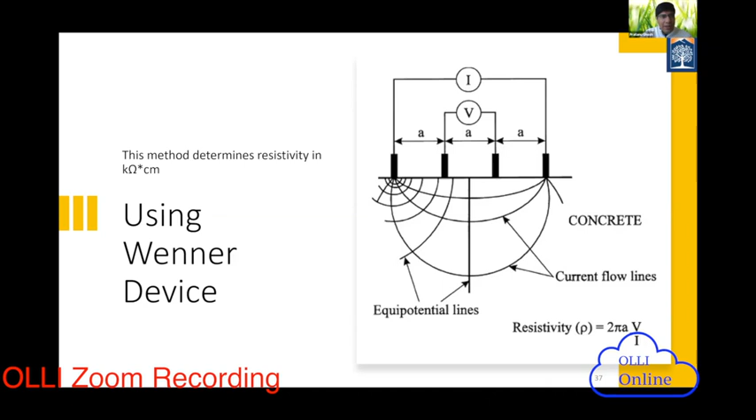Now we see how the testing parameters are done. Again, I'm not going into details of how the testing is done, we are just interpreting with the charge pass. Remember, the charge pass is the indirect indication of corrosion propensity.

If you have high charge pass from any concrete, like 4,000 coulombs, then it's really bad concrete. So ordinary concrete, using ordinary Portland cement, generally shows 3,000 to 4,000 coulombs, which is really bad, high chloride ion permeability because the charge pass is so high.

So charge pass is correlated with surface resistivity. More than 4,000 coulomb charge corresponds to less than 12 kilo-ohm centimeter of surface resistivity, they are equivalent. So in an indirect way, we are correlating surface resistivity with charge pass. Our aim is to go very low charge pass, basically 100 to 1000 coulombs, and resistivity of 37 to 254, which we got with different materials that we talked about.

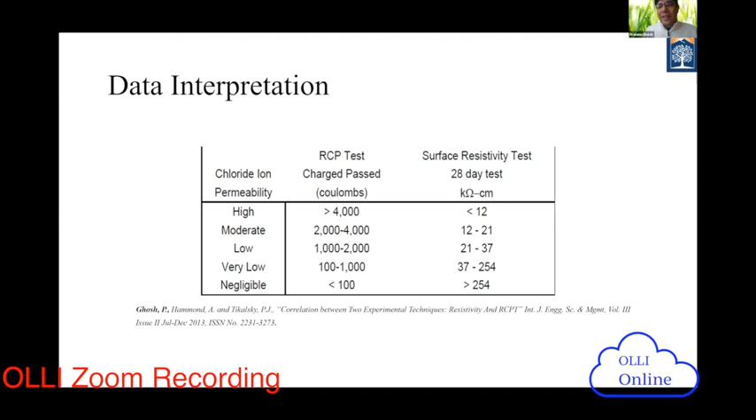We got sometimes surface resistivity values are really high on the long term, 28 and 56 days. So these are the advantages we are talking about. The newest measurement technique with newest material, we are getting very low chloride ion permeability. Very low chloride ion permeability means very less diffusion. Again, we are coming back to the original talking point.

Basically, we have to get less diffusion, big initiation time. So these are some results. Again, these are the mixtures that we have used. First one is the original mixture, 100% type 1 Portland cement. Then just to compare one of the better quality mixtures, let's say 65% cement, 35% slag, G120S. How big are the resistivity values? Only just on 28 days, 28 kilo centimeter.

So that gives an idea. Most of these are binary and ternary mixtures basically, so either two component and three component. First one is only 100% Portland cement. So you can imagine that most of the binary and ternary mixtures provide the benefit compared to your 100% Portland cement mixture. So these are the initial data. We have tested more data later, but I just wanted to show some initial data.

So that is the beneficial effect. We used better materials, sustainable, durable. We tested with the better non-destructive emerging techniques, and we got the result value right away. So you do not need to rely on long-term testing.

And then we get also charge pass data. Again, you see charge pass decrease, the values have started to decrease. The first one is the original control, meaning 100% Portland. Now you see the graph starts to reduce. Most of the binary and ternary mixes show so less charge pass. How low? You see some of them, we talked about 100 to 1000. That's our aim in between. So almost all of the binary mixes got very less charge passed.

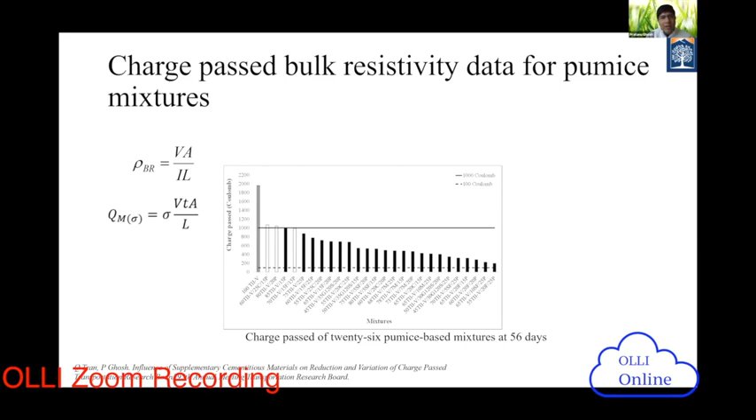Under a separate database for bridges, you can get everything together, federal highway administration, but for buildings you have a different part, or tunnels and dams. So being said that, we just have seen how pumice-based mixtures are performing at 56 days charge pass. There is a huge improvement from 2000 coulomb charge to almost like 150 coulomb charge when you start to use a heavy amount of pumice mixture, which we are relying on from the West Coast, as you can imagine.

So you would think that this would allow prediction of future failures. Yes, it is, prediction is based on modeling, based on the results, but we need to think about the periodic monitoring part, which I'm going to talk a little bit about right after this slide.

So you see that you can avoid the failure. Just you talked about the failure, because periodic monitoring is one of the major things. Once it's built, the bridges, go back every year, some basic maintenance which is very less, but then every 5 years you need to evaluate the concrete bridges. I'm going to show that so that you can predict the failure when the major rehabilitation needs. So let's show you that part.

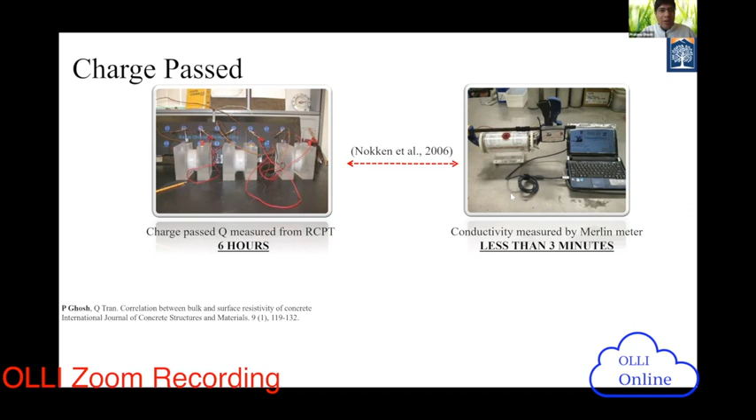This is the old testing, basically old corrosion testing, hours and sometimes days versus 3-minute testing. Just wanted to show you the conductivity. So this gives the idea which direction we are moving in the testing part. And we talked about the service life.

Basically we have two parts: one is initiation, the other is propagation, and we use different methodology to get diffusion from the charge passed. Basically the aim is diffusion. We applied the charge passed, we get the diffusion, we put it back in our equation to get our initiation time, and then you get the propagation time to get the total service life.

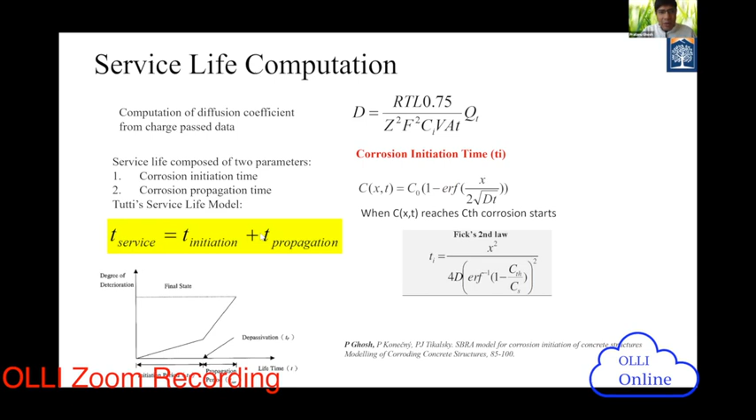As we talked about, initiation is the time from construction to the red flag, basically when the corrosion initiates, right after. And then from active corrosion to the end of the service life, which we call propagation. So total service life is the initiation plus propagation period. Again, I'm not dealing with all the different models right now. Later, I'll just talk about what we did.

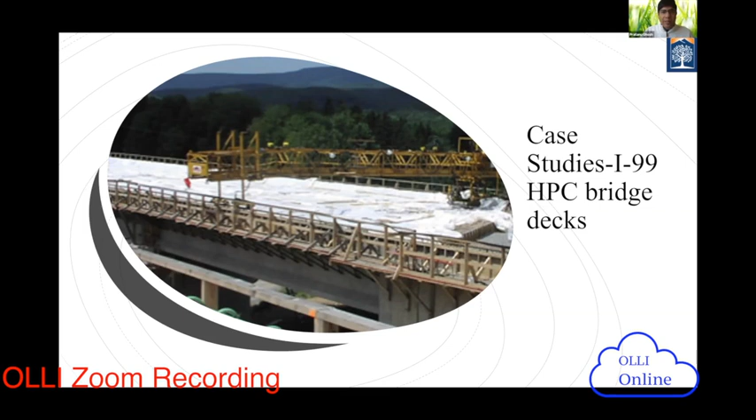This is one of the case studies we did a few years ago during my PhD time in Pennsylvania, looking at the I-99 HPC bridge decks. These bridge decks were built on the I-99 freeway in Centre County. Ten bridge decks were built on I-99, marked with the orange freeway sign for high performance concrete.

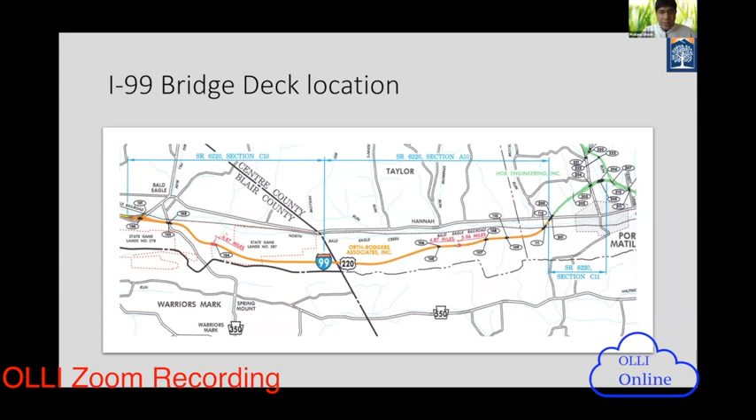Ternary mixtures were used heavily for these high performance concrete mixtures. In October 2000, the Pennsylvania Department of Transportation started its research and development of high performance concrete for bridge decks. Currently, 4 out of the 11 PennDOT districts are using at least some HPC concept for bridge decks. There's no way you can use ordinary Portland cement concrete anymore in bridges these days.

That said, how was the monitoring done? The question was, how do you predict failure in the future? As part of the research, 10 bridges were constructed on I-99 during 2005 and 2006. Each bridge was instrumented with temperature sensors to measure how temperature rises and affects the concrete.

Strain gauges measured deformation, and half-cell potential measurements assessed corrosion potential. This instrumentation was placed within the girder, inside the deck slab, and in locations surrounding the deck. These instruments were used to monitor short-term and long-term performance of the bridge deck, all based on sensor technology.

A weather station was also used to document ambient conditions, such as how high or low temperatures affect the resistivity of concrete or its strength development. Construction of these decks was monitored, and multiple early-age deck condition surveys were also conducted.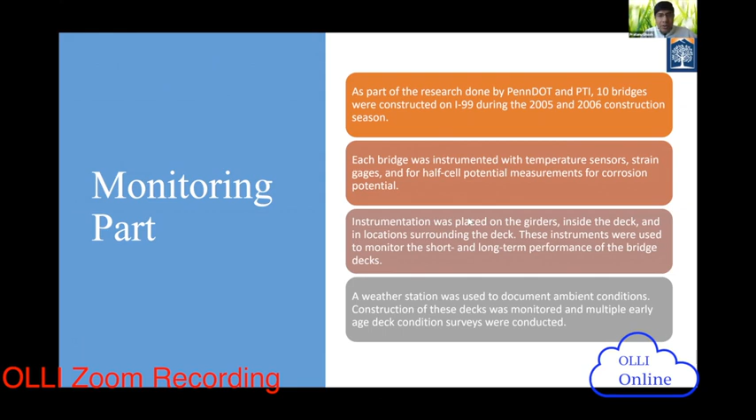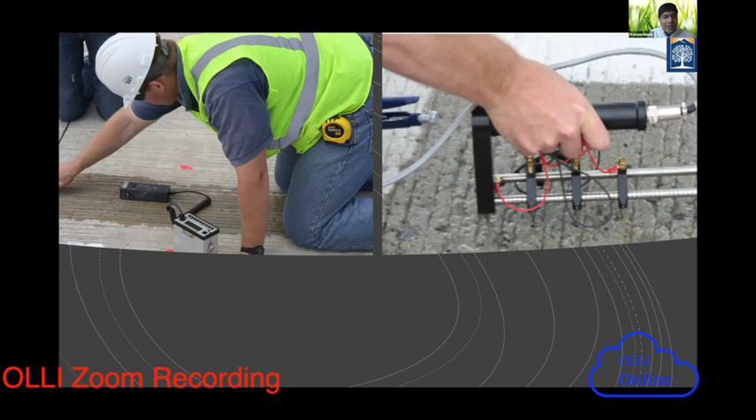Ten years ago, in the summer, in the morning, the bridge was closed for only 5-6 hours, and we did all the testing - moisture, humidity, resistivity, everything with this sensor technology. It's so easy to use, as you can imagine.

Some of the papers were published, as you can see, at the Transportation Research Board in January. That's our testing data.

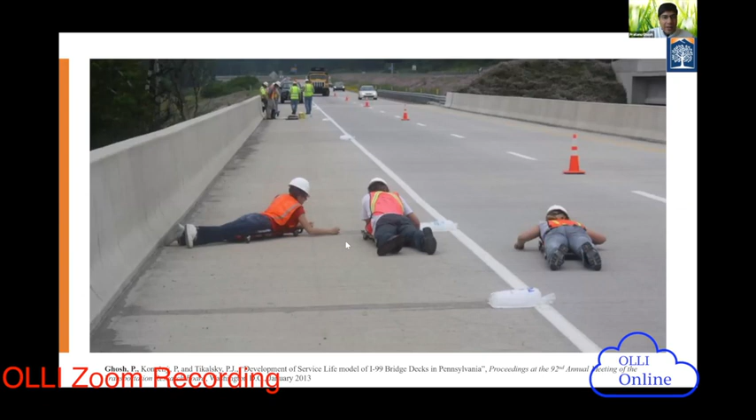They don't want bridges closed for long-term testing. They want their money, the taxpayers' money, to be well spent and to get better results. That's how these non-destructive testing technologies are evolving throughout the US and around the world.

And we need to keep in mind this doesn't include the savings from increased service life. So we have the advantageous part of using high performance concrete materials and non-destructive monitoring testing technology. The further conclusion we can draw is that using novel binary and ternary concrete mixtures can easily produce very high strength and high durability, saving money overall.

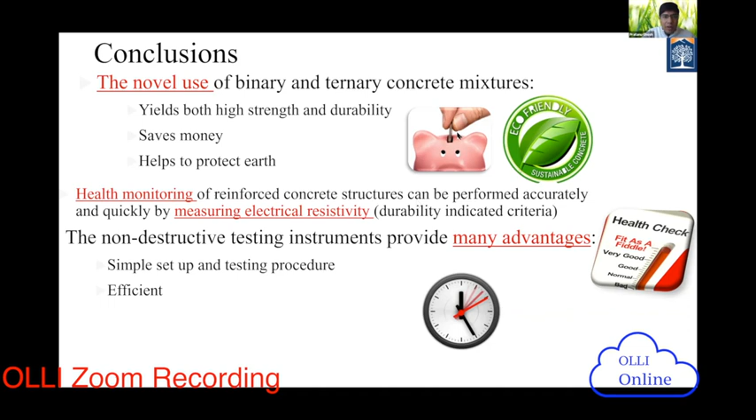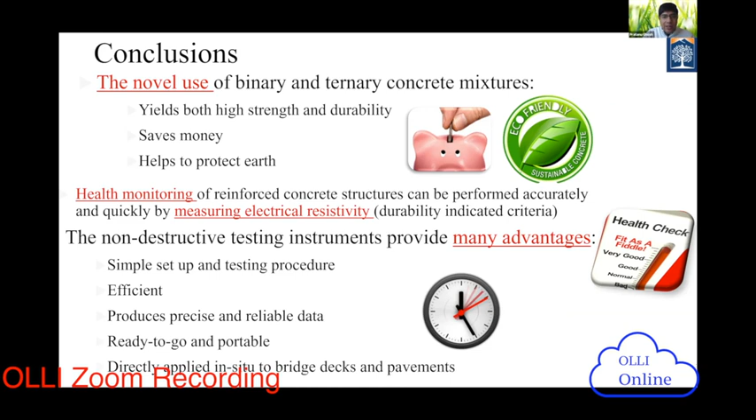So it is very efficient, easy to use, portable, and precise and reliable data it can produce. So it's ready to go, directly applied - as you see in the picture - in situ on bridge decks and pavements. Very, very useful basically.

Some of my students got really good fellowships, like the Dwight David Eisenhower Fellowship. Those are really nice. To conduct the research, they got some money through an intramural grant with me. They applied for the proposal, got some funding, and tested really nice durable material testing technology.

So with that, I want to acknowledge some of the companies that gave donations. I'm really thankful to them because we have limited resources. We got donations from several cement companies - Mitsubishi, aggregates from Headwaters, Lehigh Cement, BASF Chemical Admixtures, the second largest construction chemical company in the world, Hess Pumice (we showed the pumice from Idaho), and Cal Portland, who always donate cement to our lab.

With that, I want to conclude my presentation. Any more questions?